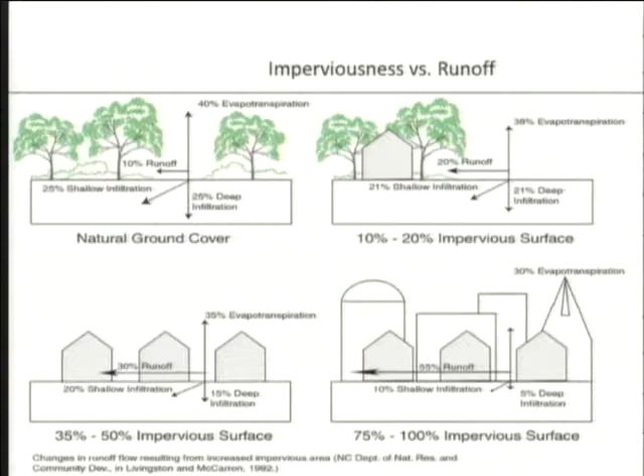At Villanova, we have a lot of projects we've developed. Some were paid by grants, some by the university, some done to meet township and state requirements. This is a little green roof we have on our CEER building, done by the university without any grant money, just to look at that technology and see how well it worked. A green roof is going to be entirely the plants and the evaporation and transpiration of the plants as they use up water.

We have about 15 rain gardens now, might be 16. They're redoing some of the center parts of campus, and we have a couple of rain gardens that keep popping up. One here with all those grasses is now, I think, 12 years old, and for monitoring has no degradation of performance. It's still working as good as the first year it was built. So it really shows how these things can be long-lasting and very friendly when they take a look at maintenance.

This is a little bioswale, one in front of one of our Fedigan buildings. And by the way, we give tours all the time of our sites, and we're glad to do it anytime anybody's interested. Just give us a holler and we'll work something up.

We even got a few rain barrels, but our results are a little mixed on an institutional basis. I think it's easier on a homeowner basis than an institutional basis.

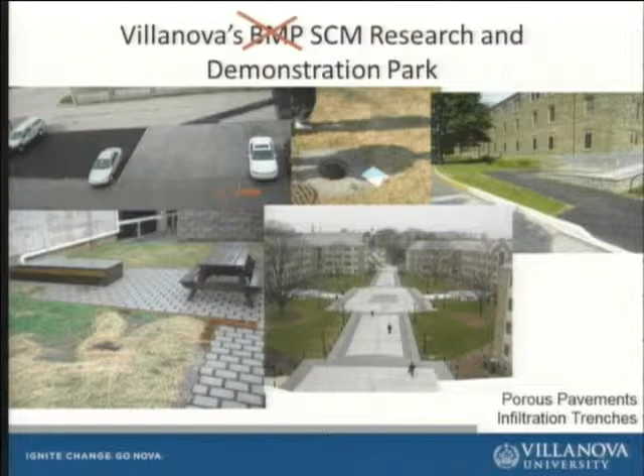But anyway, we also have a stormwater wetland that we just built this last year. This is before it filled in. This is around County Line Road, behind our law school, and it used to be a detention basin. So that's quite a retrofit, but a warning, we had water going through underdrains all the time. You just can't make any detention basin into a stormwater wetland. But any of that, my favorite projects are the rain gardens because they are simple.

They can be a very engineered structure to meet a requirement based upon a certain volume, or they can be in our backyards. One of my fellow professors has 3 of them in her backyard, that lives around this area.

They started in 1983, and since then we've been trying to figure out how they work. For example, there are very specific numbers here, like 6 inches of ponded water above the surface. That was a good idea at the time. Now we have one in Villanova that's 3 feet deep, and the one I just showed you that's worked for a long time is 18 inches deep. So a lot of these numbers, don't treat them as carved in stone, all puns intended.

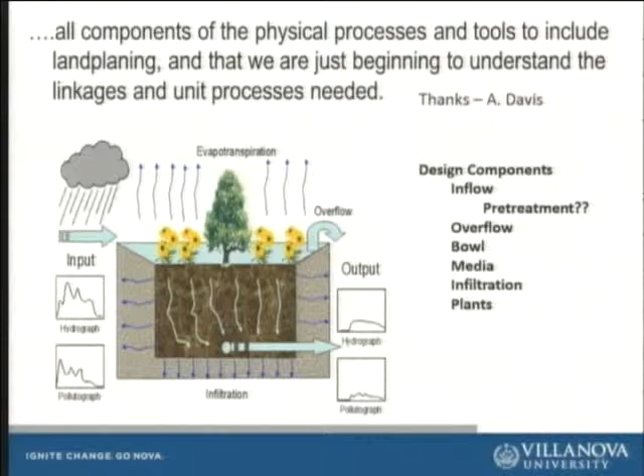We're still learning how these things work. What we do know is they seem to work very well, and they're also very robust, so you don't have to worry about redoing it every couple years. It's a very complicated thing from an engineering standpoint - we get evapotranspiration, inflow and outflow, and chemical processes - but you don't have to worry about that on a retrofit project. We can simplify this and make it so we can have something that's going to give us some good benefit without getting into all these details.

So for an example, if I'm going to build a rain garden, let's go back a little bit and look at this rain garden here. There are some components to it that are pretty obvious. One of it is you have to get water to it. Does that seem kind of simple? I can give you an example right down the road, not in this township, luckily, at a shopping center where they built some very beautiful rain gardens recently, except I don't know how any water gets to them. So one of the very simple things is the water has to get into the rain garden.

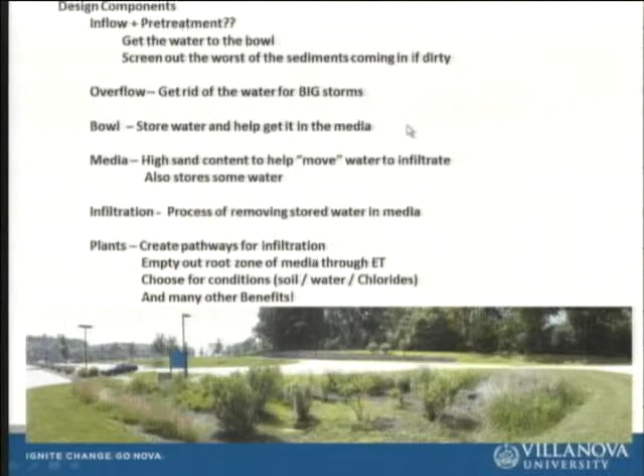So you have to - here's a test for the 3 up here - water flows downhill, right? Okay, you passed. The water has to flow into the site. I got some pictures of some in a few minutes. You can see where that does not happen.

In looking at it, the bowl part of it has a couple purposes. It holds the water temporarily to help it soak into the ground, and it basically gets rid of a lot of the sediments and trash in that bowl. So you have to think a little bit about how dirty your site is and how much grit and stuff is coming in. If it's not that dirty, the plants and the soil will take care of it, you won't have to worry about it. In our site, we haven't touched the soil surface for 12 years, but it's pretty clean coming in - it's mostly student parking in the summer, they're not there, so no big trucks, so it's pretty clean coming in.

Some places will actually have the water go through a grass strip before it gets into the rain garden, and that'll get rid of a lot of the grit and things like that. You have to worry about what happens if you have a real big storm - Hurricane Isaac or any of these things. These are designed for, as we just talked about, a half inch of runoff or 1 inch of runoff. Well, what happens when you get 2 inches, 3 inches, 4 inches? You have to figure that out - it could be as simple as just making sure you have a nice grass edge that's flat so the water can overflow and make sure it's not going into your house. Make sure you take a look at where that water is going.

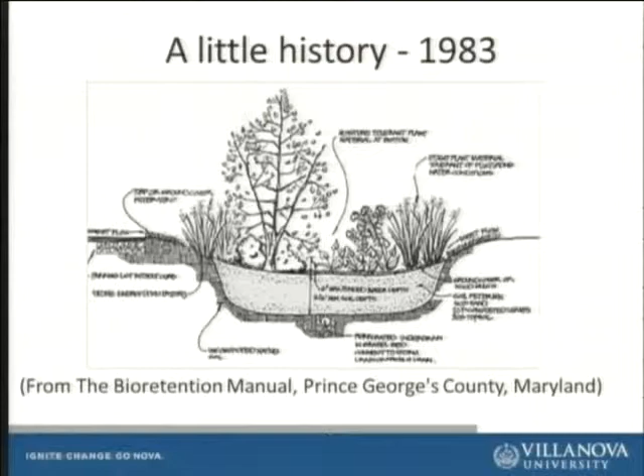There's a lot of rules of thumb. Some people use so much sand that the plants will barely grow, and that might be good in Philadelphia - I don't know if it's good in Radnor. I would use much less sandy soil here, maybe 65%, 70% - there's a lot of different mixtures. There's a firm, we bought some from Mayfield Construction, Mayfield Gardens, they have a bioinfiltration soil. It all depends, because the plants have got to grow in this stuff, right? So you want those plants to be robust, because that's what helps empty the soil of the water and also helps keep the pores so the water can go through that surface.

Keeping through infiltration is the process of removing stored water in the media. We'll talk about that a little bit later. The plants, as I said, are critical. You want a good plant mass in there.

We have a lot of different types. We have some with bushes. Our oldest one has grasses, and what we do every year is cut down the grasses in February and compost it, like we do every other place at the university where we have grasses. So that's our entire program, plus we remove soda cans and other cans, frisbees, footballs, and a few other things along the way.

So if you want a good frisbee or football, come over and visit our sites. There's probably one in there.

The temperature effects should be cleared up going through. Oils and greases are broken up at the surface. I used to think I'd never build these next to a gas station. Now I'd want to build this next to a gas station. Metals get removed in the soil. A lot of chemistry, a lot of different stuff like that we can deal with.

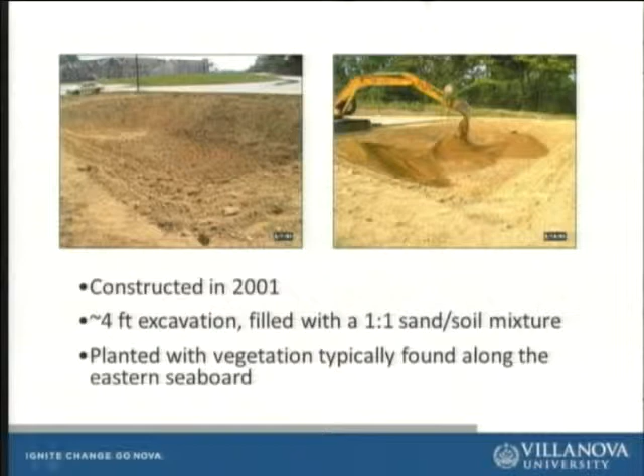There's also some ways of looking at this. Original ones always had an underdrain. We have 14 at Villanova without underdrains, and we have no problems at all. The failure mechanism of a rain garden is the surface, it's not the bottom, okay? So unless it's built in a very bad spot.

So basically, if it survives construction, in some ways you might think that if it fails we want to rebuild it, right? We just don't want to let it sit there. So an underdrain system's main purpose is in case you're really unsure of what's happening underground, and you haven't had a chance to do a lot of soil tests and things like that.

The only problem with underdrains is they release the water a little faster than I would like. So at Villanova, when we built ours, we have no underdrain. There you go, shows it coming in. A new way of looking at it is building what they call an upturn elbow. What that does is makes it a little harder for the water to leave, keeps water in there to push it and give it more time to infiltrate into the ground, and also helps with water quality.

Without oxygen, it helps to break down nitrogen, so that's a very handy way of doing it. I really should have that exit down a little bit—it can't be above, because that would not work that way.

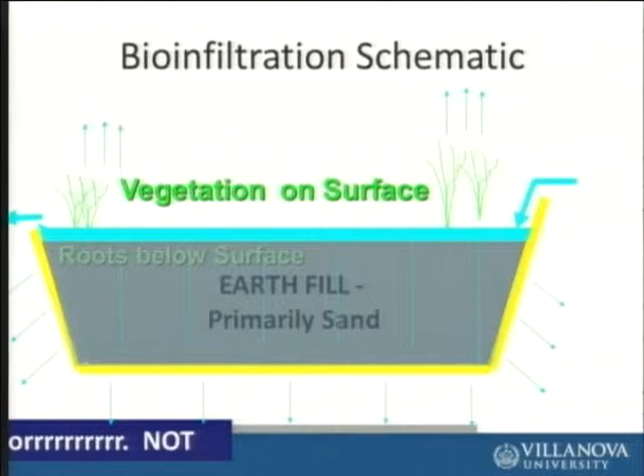At Villanova, we didn't do any of that, but when we did our soil testing, we could tell from the soil it would infiltrate, even though it does so fairly slowly. So how does it work?

The benefit of these is only about 6 or 7 times do we have any runoff leaving across the surface—everything else soaks into the ground. It's great for inspection too. If you drive by during the storm event or right afterwards, it better be full of water, right? A day or two later, it better be empty. Got it—your inspection program is done.

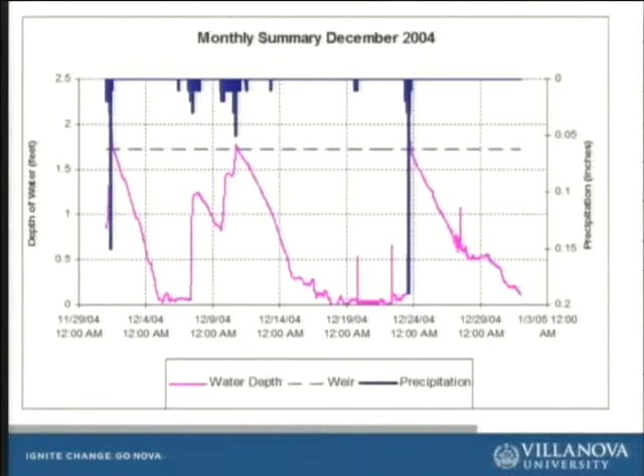All right? I try to keep things simple. Don't tell my students that—they won't believe it. We have a lot of them at Villanova.

If we have a hurricane, the water is going to go over the grass and onto the roadway. So basically, every one of my projects is a retrofit—well, I shouldn't say that. The university has built some new construction, and they had to build it to meet the stormwater requirements. I now consider it a project—I didn't have to pay for that one, which I like.

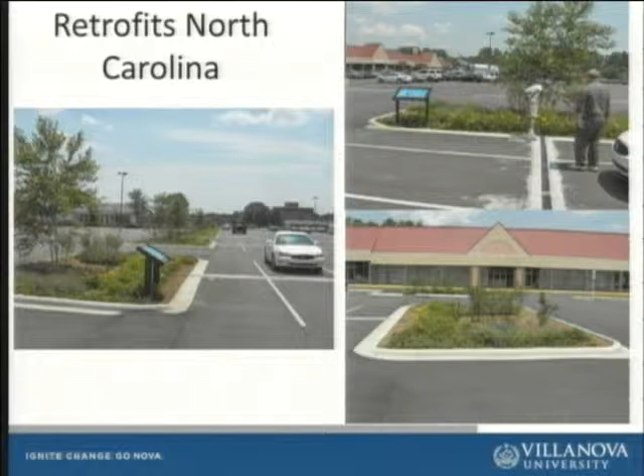They placed these over the old inlets, using the old inlet as an overflow device. Obviously this isn't your house, but you can do these almost anywhere. It just takes a little bit of imagination.

In this case, the inflow is pretty simple, right? Water just flows off the pavement and goes in. Outflow is, again, through a drainage system.

If I'm a structural engineer and I don't build the building foundations very well, they're going to fix it. A water resource engineer doesn't build it right, and we'll just let it sit there. But now I'm going to get political.

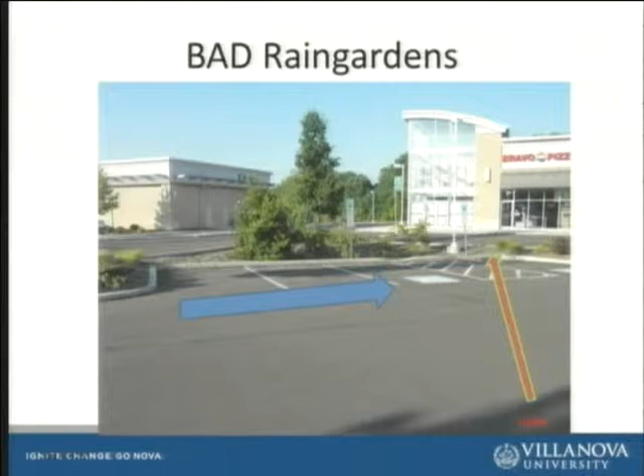Some of the rain gardens at the site are well suited. For one of them, they forgot to put the curb cut in, so there's no possibility for water to get in. But this is early - these are lessons people learn as you start a new industry.

The reason why is the law school at Villanova was built on a parking lot, so they didn't have to do much. They ended up building a little detention pond instead - I have no idea why. I would have much rather taken sites like that and made them rain gardens. I win most of my battles there, but not all of them. So that's the type of thing.

They took a street - every house in the street, they built a rain garden. It's inside the right-of-way, so the township did the construction and the dirt work. The homeowners did the planting, and the homeowners are responsible for maintenance. This was built in 2003, so it's now 9 years old.

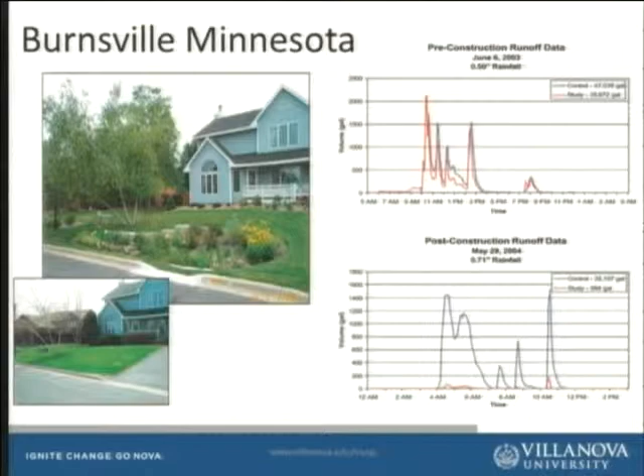All right, and I've talked on way too long. I'm going to skip this. We're building a new site at Villanova. I'll just show you a picture of it, where we're going into a swale, into a rain garden, then into an infiltration trench, trying to put some of these together. But this is too much for a homeowner. But we like the idea of sequencing things, so it's not just one device to solve all the problems. And we do this because of maintenance and longevity issues.

But anyway, I'm going to stay for the next 2 talks, but I will be leaving right at 3:30 because my mother-in-law and my nephew from the Navy in Italy are visiting, so I have to get back to that. But do you want to take a second or two for questions now, if you have any?

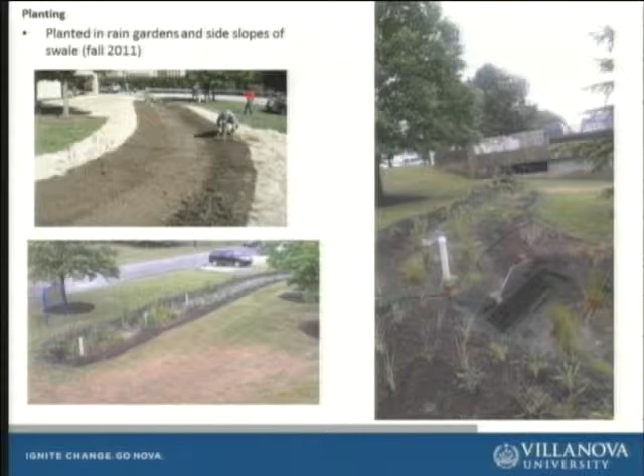Sure. I saw you changed BMP to SCM. What's an SCM? Okay. BMP came out of EPA as best management practice. And it kind of comes from the sewage treatment plants, where best available technology means we don't really understand, this is the best we can do. A lot of people in the profession, and I was part of a National Academy study a couple years back, recommended we start calling them stormwater control measures because it's a much more engineered and understood process.

This is no longer just building a pretty rain garden and not expecting results. What we found is you do expect results. These do work. They will meet the requirements. So those questions are done. We still have some more understanding to gain. But it doesn't mean pretty rain gardens isn't still a good term, especially for homeowners or projects like this.

Yes, ma'am. You were mentioning that you want the rain garden to fill up, and you also want it to empty in a certain amount of time. That's so we don't create room for mosquito breeding? Yeah, basically, water in the soil is not as much of a problem for that. There's all sorts of different studies and different thoughts on this. North Carolina basically says if it's like 2 or 3 days, you're okay. The mosquito would have to land, have it hatch, and there are different breeds. Like if you look at studies in North Carolina, they have faster breeding mosquitoes than we have.

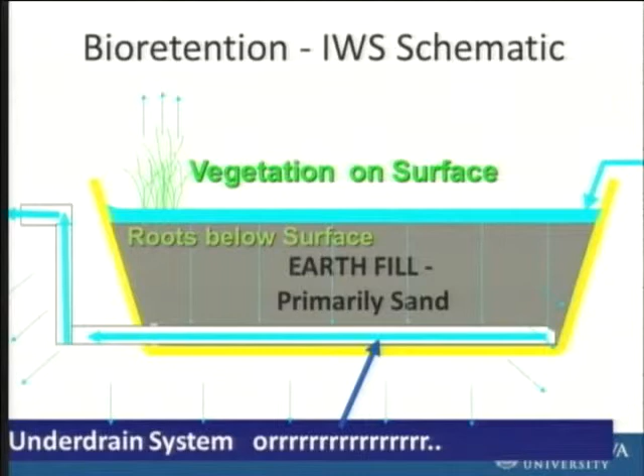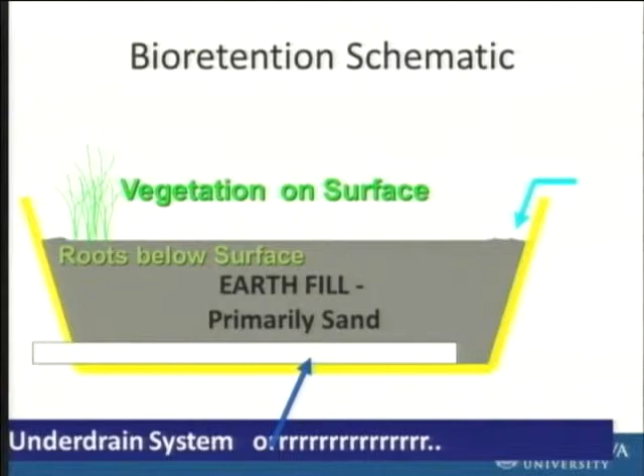This is the one that they used to do that I don't recommend anymore, the straight pipe leaving. Because this goes out too fast and doesn't infiltrate as much. And you want to get some of that water back into the ground. And lastly, what happens to all the pollution that's trapped? Okay. Well, so far, that's in the surface. As I said, the surface layer is going to take care of the metals. It's going to break down the oils, the nitrogen and phosphorus. The phosphorus binds to the soil.

And we've done a little study, and we figured out that the first two inches of soil is probably going to take about 30 years to be completely filled up. And then it's going to move into the next couple inches. Used to think, well, every 10 years, maybe we're going to have to take off the first couple inches of soils and get rid of it. And it's not going to be hazardous unless you have a smelting plant right above you or something. You can just throw it on the ground, put grass seed on it. Now I'm thinking it might be more like 50 years before you have to worry about that.

First of all, runoff is dirty when you look at the whole watershed. If you look at a little site, it's really not that dirty. In fact, to get the measurements for our studies, we have to work much harder than any sewage treatment plant operator because the percentages are very, very low. So the good news is, every 30 or 40 years, maybe you want to take a little bit off that top because of the salt buildup, because the plants aren't going to grow as well, maybe get a few extra sediments. It's basically also going to rejuvenate some of the infiltration capacity too.

So far, I keep on looking at my sites and saying, well, if I wait, I'm going to see if I can take off an inch and see how well it does. But I haven't seen any change in performance, so I haven't done that yet. So I'm hoping it happens before I retire. The only site where we've seen problems is on an infiltration trench, the rock beds, where we had a very large, very dirty area going into a very small spot. The normal ratios go about 10 to 1. We went 300 to 1. So every rain, we're getting a lot, and the bottom of that sealed very quickly, so all the infiltration is out of the sides.

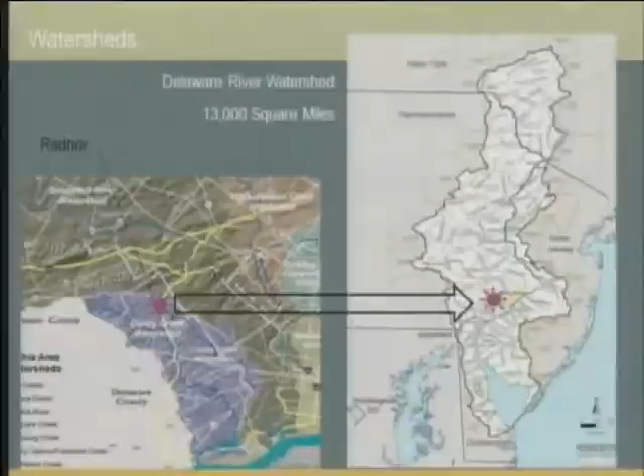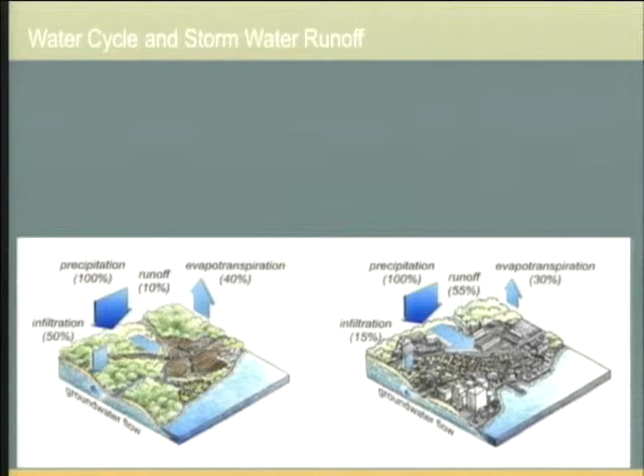I work for the Delaware Riverkeeper Network, and we do work throughout the Delaware River watershed, which is about 13,000 square miles. And right where we are now, we're in the Darby Creek and Cobbs Creek watershed. Traditionally, there has been reasonable infiltration and evapotranspiration, and because of a lot of the urban and housing development, there's a lot more runoff, so that's what we're trying to deal with.

And just as an impact explanation, when you get too much runoff flashing into streams, it just digs them right down. You get to see a lot of down-cutting streams. Sometimes those will go 15 feet down. A lot of impacts happen. You get a lot of silt pumped into the ponds, and they start to fill up. Everybody starts to have to worry about dredging. It also sucks groundwater right out of the ground, so it's bad for the woodlands it happens to be going through.

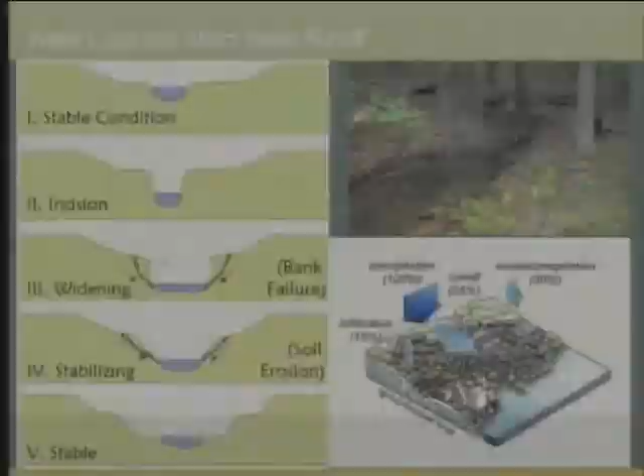So I'll just touch quickly on the different stormwater best management practices, and I'm glad there's a new term for it now rather than BMPs. Examples are rain gardens, bioswales and infiltration basins. They reduce runoff, improve infiltration and clean the pollutants. So I'll just skip right by there. These are the two basic types of rain gardens. One is with the underdrain and one's without.

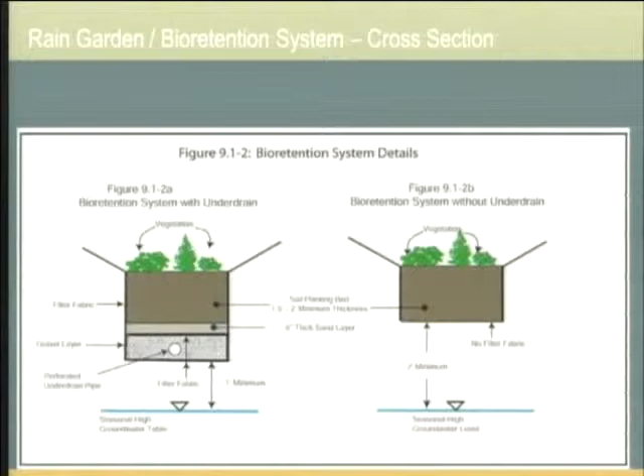So basically, the issue is, at your own property, do you have infiltration allowable? Is it clay soil where the water will not go through, or is it more sandy? If it's a clay soil and needs some help, there are different ways to deal with it. Just pond less. In other words, if the infiltration is going through slowly, just put in maybe 3 inches of water for a rain garden. If it's a sandy soil, then it could handle more, maybe a foot of water held in there.

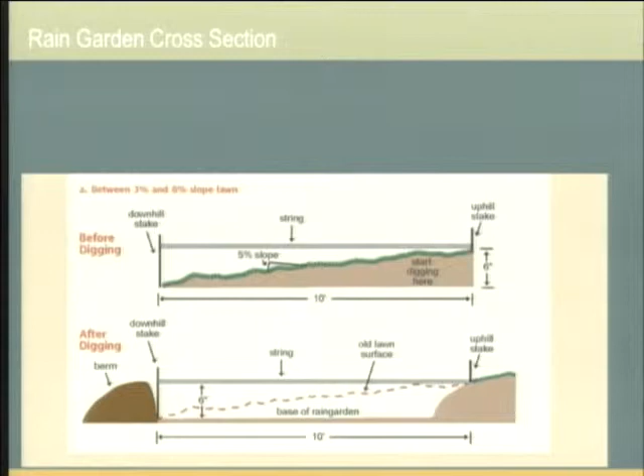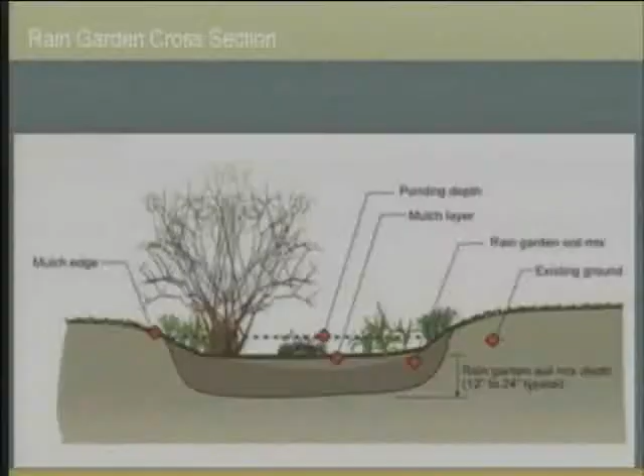And so I'll just get into some basic design considerations. Do you have a green area that's lower in elevation than your house and the pavement? If there is, or if you can dig it out a little bit, then you can put in a rain garden. Are the existing soils sandy and well drained, or clay and poorly drained? It's good to test the infiltration. The best way is to dig down where you're thinking of having a rain garden, say about a foot, and then start to test it.

There's a couple ways to test it, and I have some links for a good way to do it at home. For the larger facilities, we hire engineers to do double ring infiltration testing. What I also like to do is send out the soil for a sand, silt, clay content test, so that would go to Penn State. Most people just think of a soil test, a horticultural analysis, which is nitrogen, phosphorus, potassium, and pH. But make sure to ask for the soil texture so you can get sand, silt, clay.

I'm just going to run through the steps on a larger rain garden we just put in at Haddon Township, New Jersey, at a Van Sciver school. So I'm just going to go through the steps here.

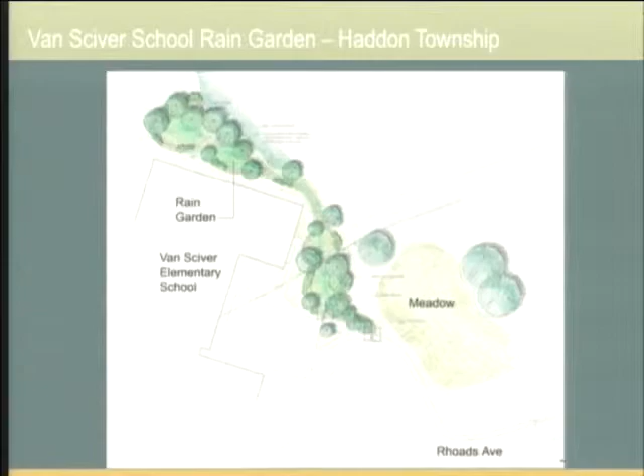We actually did some soil swapping just so that we could get good infiltration, because you also want to watch budgets, bringing in all the extra soil from off-site. Lots of times, a standard set of engineering drawings will say, put in rain garden soil, remove 3 feet of soil and put in 3 feet of soil. I'm like, that's crazy, that costs too much money. I like to work with what's there. So that's what we did at this project.

Meliora Design and Jonathan Alderson, landscape architects, did the project with my help. It's a little hard to read the engineering plans, and I don't have a pointer, but I'm going to run up here.

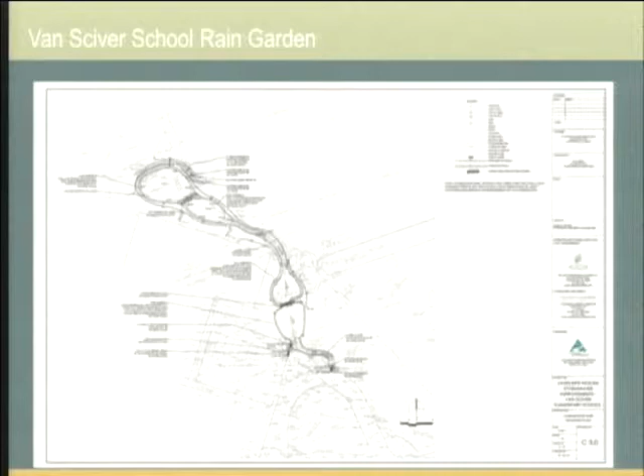So it was roughly 3 acres total, not impervious. I'd say about an acre of impervious, considering the pavements and the roofs and things like that, and there were actually some tennis courts coming in.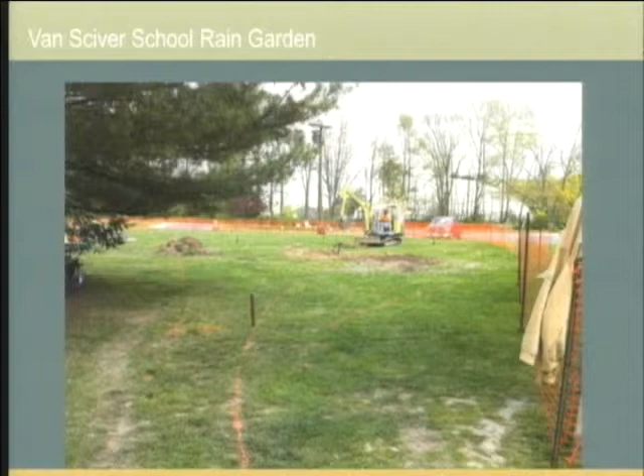So this is the area, this is half the rain garden that we're going to put in, and this shows some of the construction. We made sure to use small vehicles so we wouldn't over-compact the soil. Now, in your backyard you're just digging, but this is just an example for those interested in larger projects. So this is where we had the water come in off two areas of pavement.

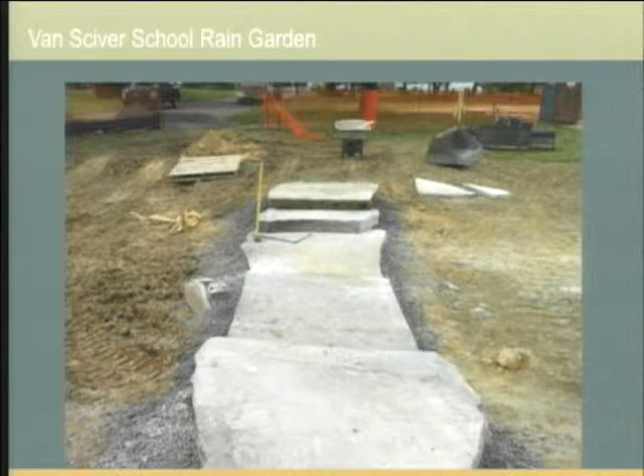And as it's downhill, what we did is we put in some mini berms, which is quite common. Here, we used this stone, which was also used for walkways, so they help pond the water just a little bit. Going downhill, we pond it, pond it, pond it.

This is during construction on half of the rain garden, the upper end, and there are some of those walkway berms, which we call weirs.

What we did was turn subsoil into good planting soil just by adding compost. The basic difference with topsoil is that it has about 5% organic matter on a dry weight basis, which is about 15% on a volume basis. So about a 5-to-1 ratio of subsoil to compost usually makes it into topsoil. Of course it matters what the soil is, whether it's heavy clay. So we just used the existing soils and added compost, which also helps with initial infiltration and water holding capacity, and as it breaks down it's very good for the soil.

This is where the township or school district paid for this, and they were told they had to do something. It was NJDEP funding, a 319H grant, federal funds out of the DEP.

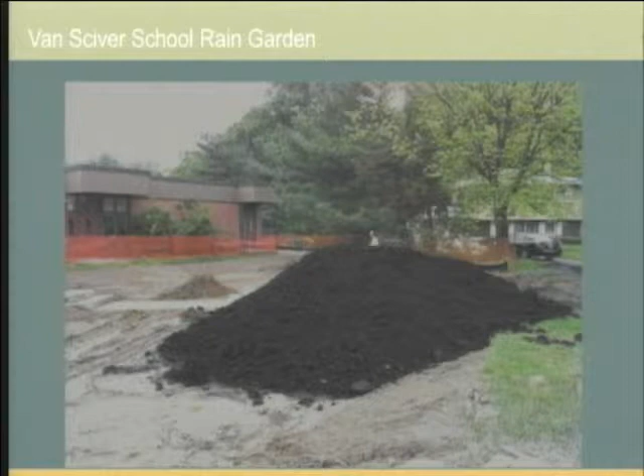But I still want to understand the mechanics of how this came to be and how somebody allocated money to do it. Sure.

Going back, Sadler's Run, we care about rivers and water quality. Sadler's Run goes into the Delaware River as it goes through Newton Creek. We care about the whole watershed, not just the river itself. So Sadler's Run runs into Newton Creek, which runs into the Delaware River.

So as we're working on Sadler's Run, we study it, and NJDEP says, before you fix Sadler's Run with all this erosion, let's work on the stormwater and all the inputs that go into it. So we came up with this project to help reduce the gush of water into Sadler's Run, which erodes it.

That's how this came about, and then we look around town for opportunities to put in rain gardens. They're all over the place. Basically, you're riding along and you go, you could put a rain garden there, you could put one there. You just need funding, so we were fortunate.

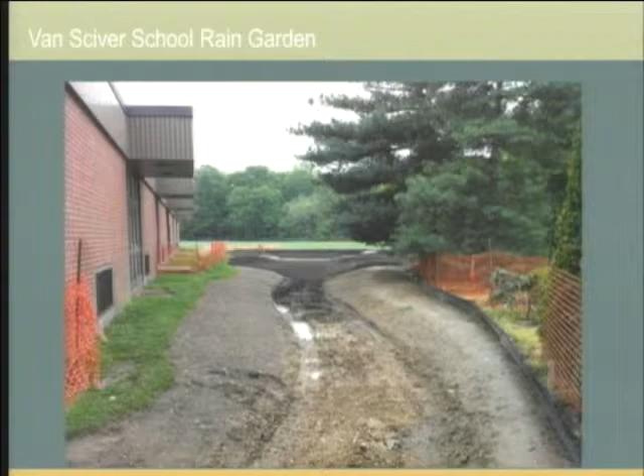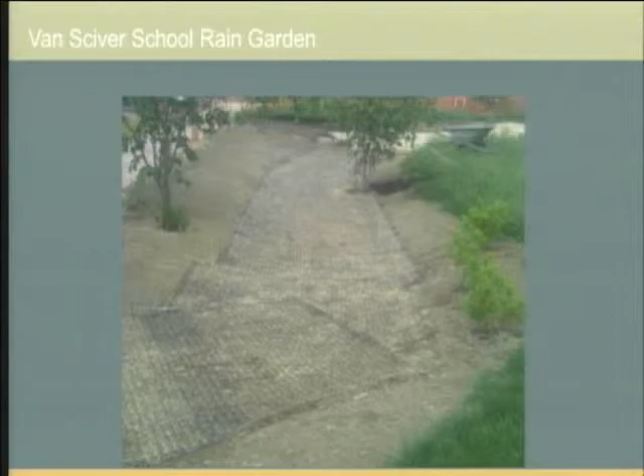So this is an example of some fabrics - if there's flow in your rain garden, you want to put down fabric to help manage the flow. This is right after we constructed it, halfway through planting, and we had a very large rainstorm. It always happens.

I wish storms would at least have the courtesy to wait for the plants to grow better. We had a huge storm. We had the inlet blocked off, but it just flooded through all this pavement - it was a fairly large watershed for a huge storm.

Do you remember what date this was? I wish I could look it up, but it was just a little flash storm, about 4 inches - it felt like 4 inches in about an hour. So it was a gusher. We haven't seen anything like it since.

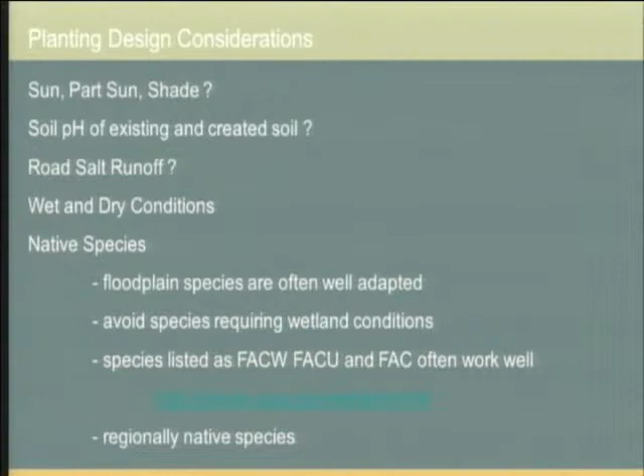Species that are listed as wetland, just don't bother with. But USDA has broken up plants into FAC wet, FAC upland, and facultative for their wetland lists. So generally, those are reasonable plants for a rain garden because they can handle wet or dry conditions. It's a very rough guideline.

Plants that grow in the region are useful because then you know they're hardy. So basically, native plants from our region are great plants. The USDA Plants Advanced Search is a good way to find plants.

So if you Google USDA plants and then find the Advanced Search button, you can pick different types of characteristics for your rain garden, including inundation period, which is generally you want about 1 to 2 days. And then whether it be sun or shade, what kind of soil, and it'll actually output a list of plants.

I did this one for the Clem McCrone rain garden, so this is the output I did. And you can search for salt tolerance, road salt tolerance. Well, I don't remember if it was road salt — it's a really good question. It was about a month since I did it, so I can't remember if it said aerial salt or soil salt.

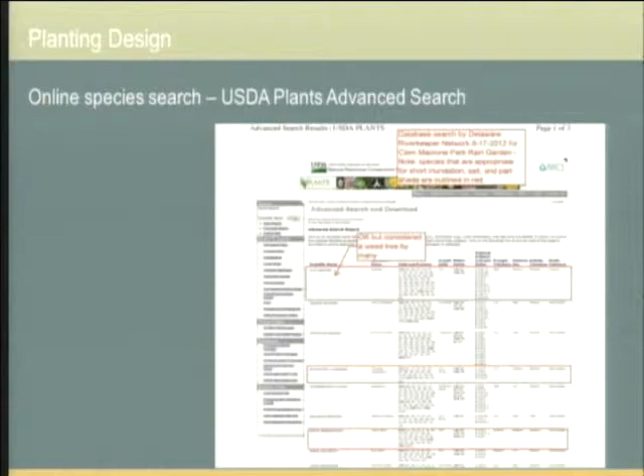So, in all of this, you'll look through this list, look through that list, and use your judgment on the plants. And then nature will take over.

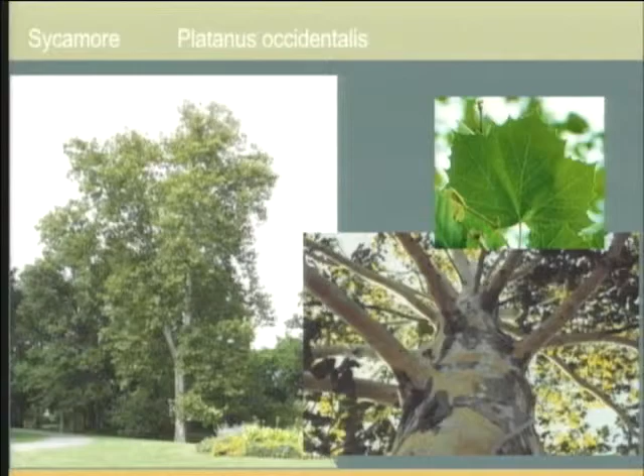Yeah, that's right. And these are just some quick examples. I'll just start with the trees. The native sycamore will do fine. The pin oak, black willow, river birch, sweet gums — you can even get these without the sticker balls.

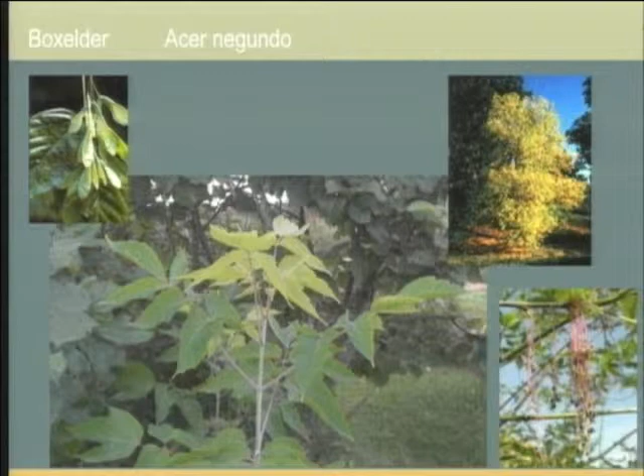Red maple doesn't like salt necessarily. Box elder — you can't buy these, but you could move them. They grow everywhere like weeds. I put one in, because they're too weedy around here, and people consider them junk trees, but they're native. Some people can't stand the box elder bugs if they infest your home. But it'll grow in a natural rain garden very quickly, and it's very fast growing — about 2-3 feet a year.

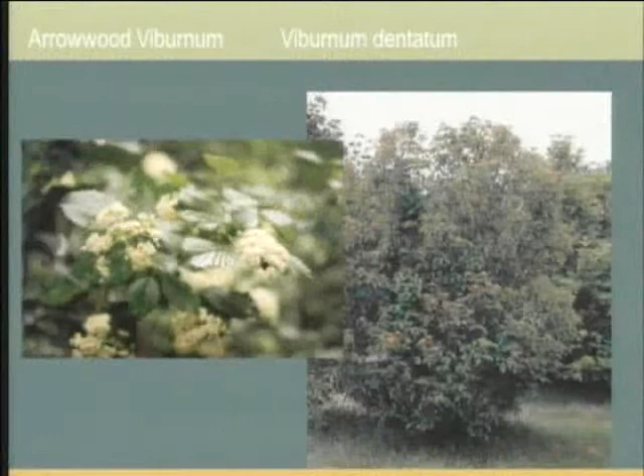Black gum is a nice plant, salt tolerant, can handle wet and dry. Winterberry — these are just some examples of shrubs. We have winterberry, yeah, that's good. Arrowwood viburnum.

Switchgrass is an amazing plant, you can't go wrong with it. I have a list of where I've borrowed so many of these photos at the end, so I put the credits right underneath.

Switchgrass likes sun, but other than that, it's very tolerant of heavy salt, no salt, inundation, no inundation. Its roots will just change up — it'll take over a rain garden. There's basically many grasses that can handle salt.

For instance, river oats is starting to be available in nurseries. Soft rush is a great plant for some of the wetter areas, swales, and foxtail sedge. There's so many different varieties of plants, and the background of what our meadows are is grasses. So if it's an open rain garden, open bioretention area, grasses are what it's going to want to be. It's nice to put in perennials and keep it pretty, but it wants to go towards the grasses and grass-like plants.

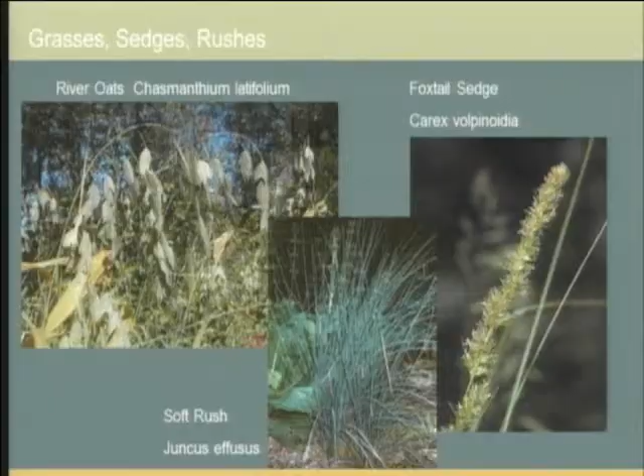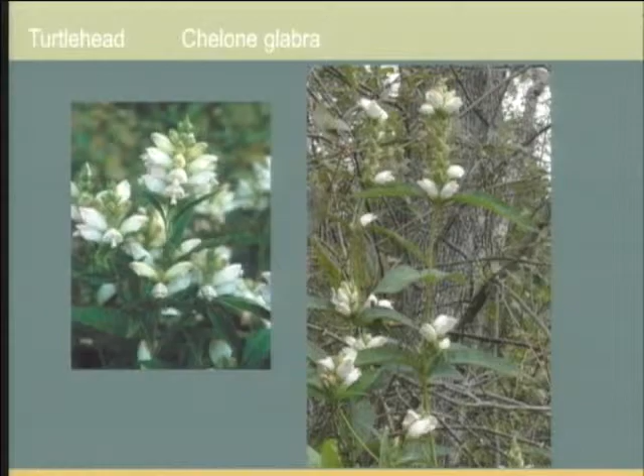Cardinal flower, in a wet spot in the rain garden, might live. Turtlehead can handle it — I put it in, but it got shaded out in my rain garden, and nothing's living anymore. But it looks great for a couple of years, and over time things change. The Joe Pye weeds, bone sets.

People would think ferns would grow well, but it really has to be a shady spot for them to grow well. On any new construction site, ferns just slowly die or barely grow while other things grow quicker. But if it's in the backyard and in the shade, it would do well. There are some that like a little more drought than the cinnamon fern.

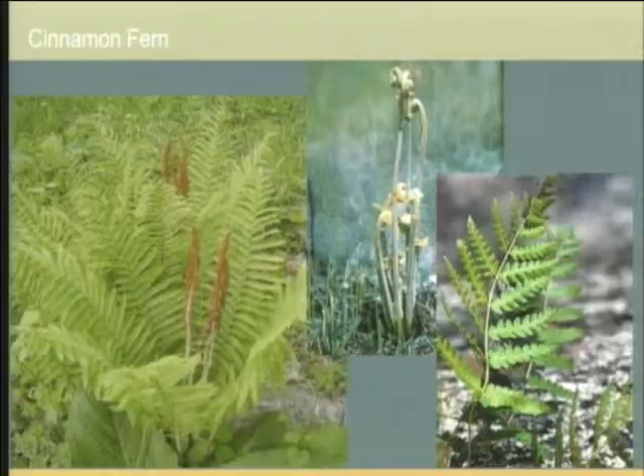Think about year-round interest when you're designing it. For instance, blue flag iris in the spring and black-eyed Susans during the summer, asters in the fall. Moss can be a component of a rain garden or your landscape.

Around the edges of a rain garden, one always has dry edges, so I'm just going to quickly flip through some of the great trees that could be used around the edges.

This just shows that I wouldn't take out non-native plants right around the rain garden unless they're invasive. Going back up to this, even a black cherry might be considered a weed tree or a junk tree, but it's got great wildlife value.

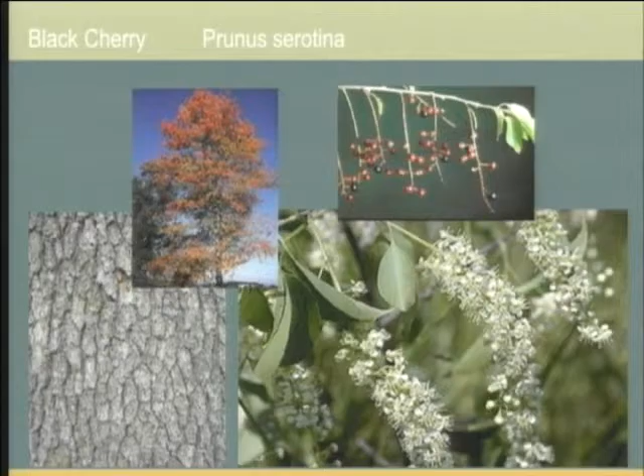Quickly, Pinxterbloom likes the sand, and maple leaf viburnum. Now you're probably wondering where to find all these things.

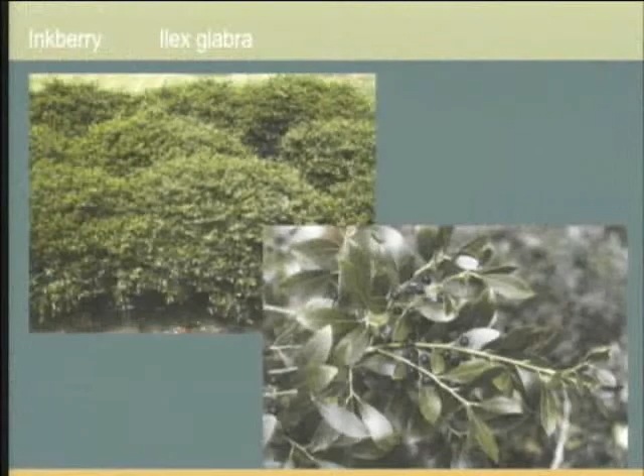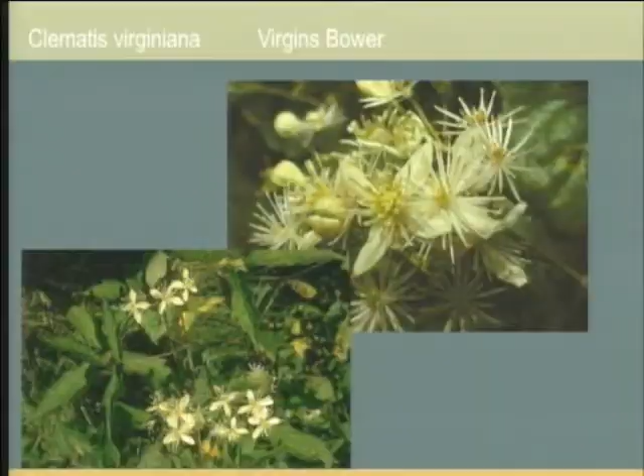The Pennsylvania Native Plant Society has a good list of nurseries. Some of these can also be found at the big box stores, but generally only about 1 out of 50 plants at, say, a Home Depot is a native. And sometimes they're mislabeled — I bought a native witch hazel at a Home Depot and it wasn't, it was non-native. So these types of plants can be put around the edges of the rain garden.

Even a plant like this little blue stem — you look it up and it likes severe drought — it'll even grow in a rain garden. And also the Andropogon virginicus. Thank you, Rob.

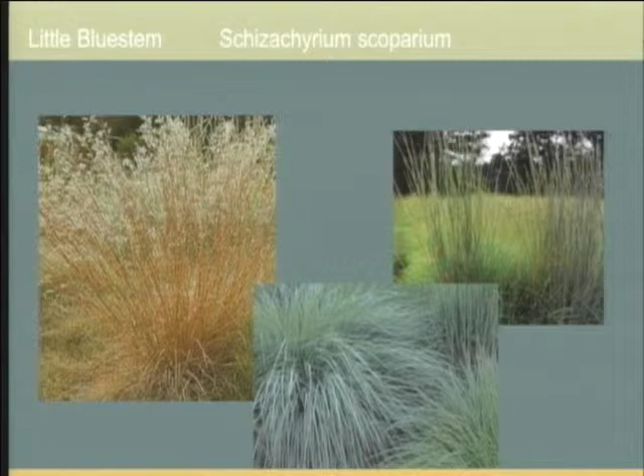Which is a blue stem also, or a beard — Andropogon virginicus, I'm sorry, I'm forgetting the common name on it. Even that plant, even though it's listed as more of an upland plant, can do just great in a rain garden.

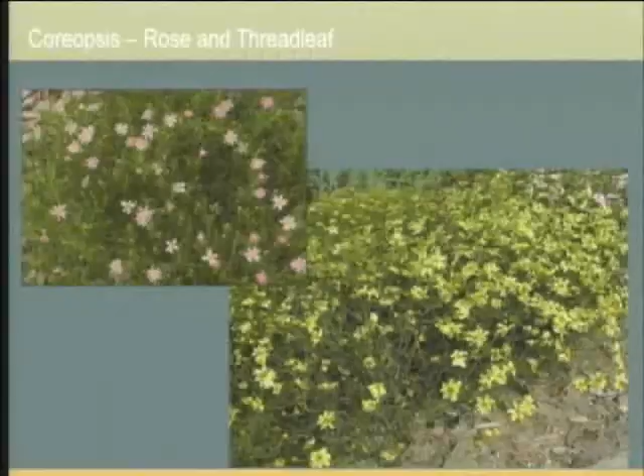Indian grass can handle a rain garden. Purple coneflower can. Coreopsis, Monarda, they can do rain gardens too. There's the asters, and this likes a little bit of moisture.

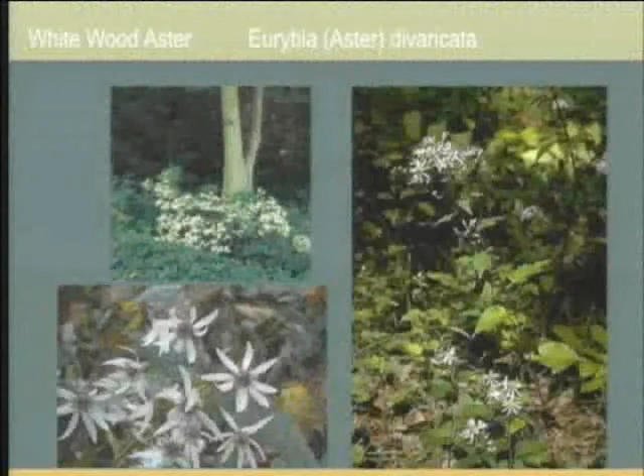White wood aster just on the drier fringes of the rain garden. New York fern would do fine down in the bottom of the rain garden too, and it can also work in uplands.

I'll flip through these quick. Very few grasses like the shade, especially native grasses. There's one or two oddballs like wood reed grass, which you could buy at a wholesale or maybe a specialty shop like Red Bud Nursery might have them.

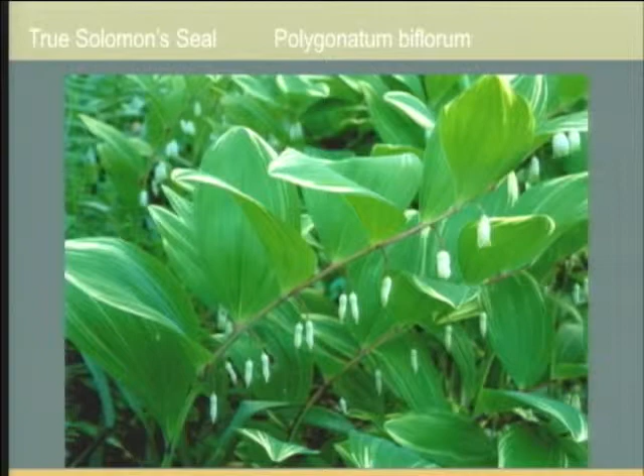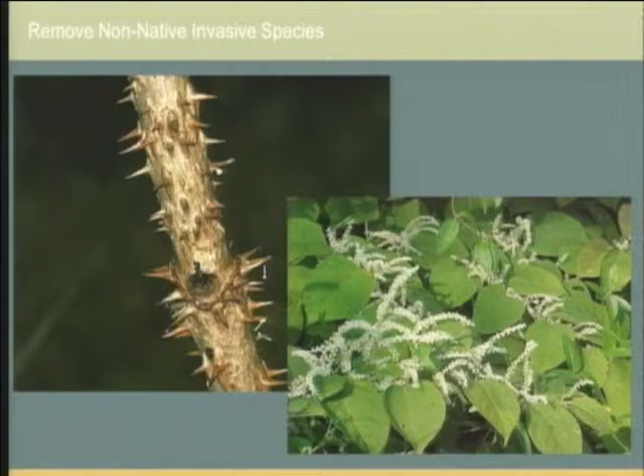Mountain laurels for the fringes, and just a note — if you have non-natives around, get them out so they don't invade the rain garden. These are just two examples: devil's walking stick and Japanese knotweed.

Any questions? We took care of plenty during the talk, so I think we're ready to go.

Be on the desktop. I don't see it. I see my presentation, I'm not sure if you put the other one on there. I didn't know about the video. Was that on this? Yeah, it was on the flash drive. It's no worries. Sure.

So I sort of have a big picture — where can we go with this? What's the benefit of these stormwater control measures? People think of them as individual, disparate pieces of infrastructure, but what's the impact they could actually have in improving a community? I'm here to present the Philadelphia perspective, where we have a program in its second year of implementation that includes more than $2 billion of the city's investment towards stormwater management infrastructure.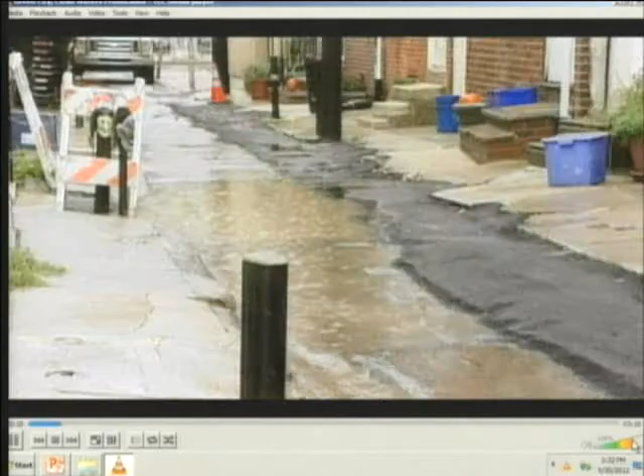You know what? It's no problem. It gives a better intro than I could, but it's no worries.

We have a few great videos. If anyone's familiar with Green Treks, the organization, they make really wonderful sort of storytelling videos. I gave a rain barrel workshop a few months ago where I used a few of them. They have produced for the water department a how to install a rain barrel workshop video. They have our Green City Clean Waters story.

They have a 3-minute sort of short summary, which I was going to show you, as well as I think a 10-minute really detailed story, but it just gives sort of the overview of who is involved from various city agencies and what the overall goals of the program are. I think you can link to them from our website directly, which is phillywatersheds.org.

What I'm here to talk about is the Green City Clean Waters program, which, as I mentioned, is the city's more than $2 billion commitment. It's a regulatory obligation for the city of Philadelphia. It's aimed at our Clean Water Act obligations, specifically our combined sewer overflow regulatory obligations.

So the city of Philadelphia is split. It's a 60-40 split. 60% of the city is managed by what's called a combined sewer system, which means that the sanitary connections from your home, as well as the stormwater inlets in the street, are actually combined into one intercepting system that's designed to go to the wastewater treatment plant. But during wet weather, that system is designed to overflow that mixture of sewage and stormwater into our rivers and streams in order to protect the wastewater treatment plants.

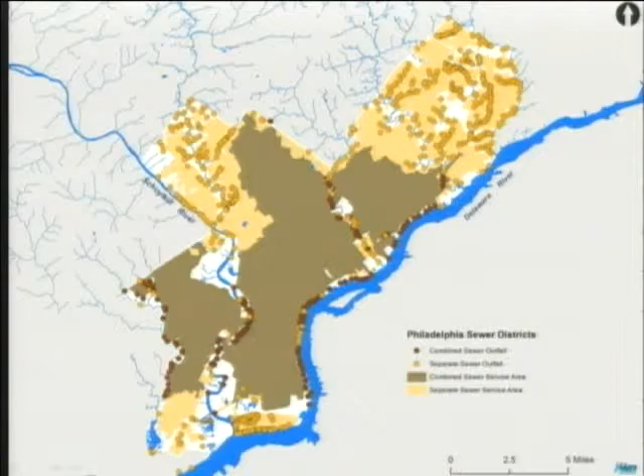One is through what we're calling privately funded green stormwater infrastructure, which is being achieved through our stormwater regulations that have been in place since 2006, and I'll talk about those in a few minutes. There's what we're calling the follow the public works method, which means that any time the water department replaces any sort of piping within the streets and right-of-ways, they should be replacing those streets with streets that incorporate stormwater management controls, and the same would go for the streets department within the city of Philadelphia.

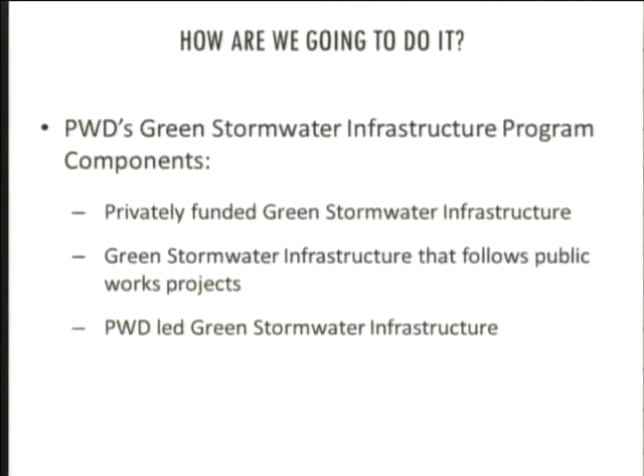And the last is what we're calling water department-led green infrastructure. That's where they're actually looking for opportunities, right now mainly on publicly owned spaces, but we're also looking at public-private partnerships, basically looking for large opportunities to implement regional control facilities and other sort of big green stormwater infrastructure.

But that established a first of its kind set of stormwater regs that actually not only worked for greenfield development, but actually redevelopment within an area, because a lot of times what you hear is pre versus post when it comes to development, and what this actually did was push people back to a higher rate of stormwater management. If you're redeveloping a parking lot, you have to do more than just replace it with the stormwater control that would have been on a parking lot.

What we like to highlight here is that throughout the city, we're going to be achieving our greened acres, which is our unit of measure for our program. And this will be coming to us right now for every development that comes into the city, disturbing an area greater than 15,000 square feet.

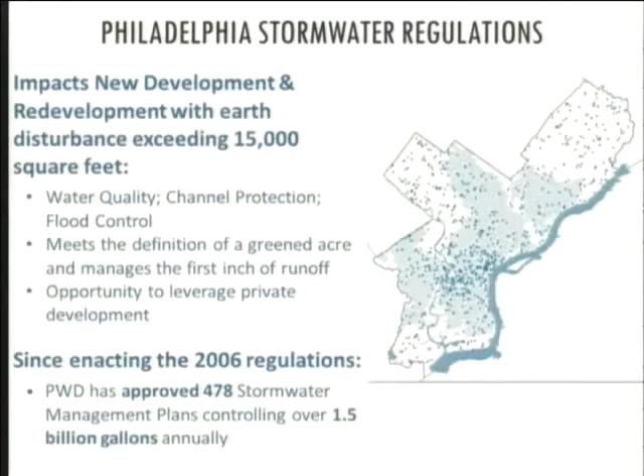I also mentioned that the Philadelphia Water Department is a stormwater utility, which means that they collect as a part of their water revenues a stormwater rate. That's been in place since the late 60s, but over the past decade, they've actually been working to update the rate structure, because originally it was in place using your water meter as a surrogate for what your stormwater rate should be, because that was the information that they had available.

But through the advances with what's called geographic information systems and data systems and better understandings of what the actual parcels are made up of on the ground, they were able to go back and reevaluate your stormwater rate based on how much stormwater the parcel is generating.

So what we have here are two sort of opposite side of the spectrum examples, where on the left you're looking at a parcel where the building occupies the entire parcel. It's going to be a multifamily residential. This is an apartment building essentially covering the entire site. Gross area is 24,000 square feet. Impervious area, 24,000 square feet. Previously, they were charged a stormwater fee of $4,700 a month because they occupied a huge meter for that many units within the structure, where this site on the right, it's 600,000 square feet, 500,000 of which were impervious.

And because it's theoretically a big box retail site, may have some sinks, a few restrooms, not a large meter, their stormwater bill was previously $400 a month because that's how the rates had been set. Now that site has been readjusted based on a gross area impervious area ratio to be a $2,500 a month stormwater cost. What we're hoping that means to our program is that a site like this with a really large parking lot is going to be interested in retrofitting and managing stormwater on site.

When I mentioned following the public works, we're actually in the process right now of establishing a tool that will be useful, I think, to a number of municipalities. We're developing a Green Streets design manual that'll have designs and specifications for putting green streets infrastructure into the ground for basically any utility that's going to open up a street, especially curb-to-curb openings, which is often what the city of Philadelphia does when doing pipe replacement for the water department.

We have a note in here about streets being resurfaced. It's not yet going to trigger this process for just a strict repaving or resurfacing of a street, but new streets going in and curb-to-curb openings ideally will be able to sync up so that every street that's replaced within the city is replaced using green stormwater infrastructure tools on top. The manual is in draft right now. We're hoping for it to be released publicly late this winter.

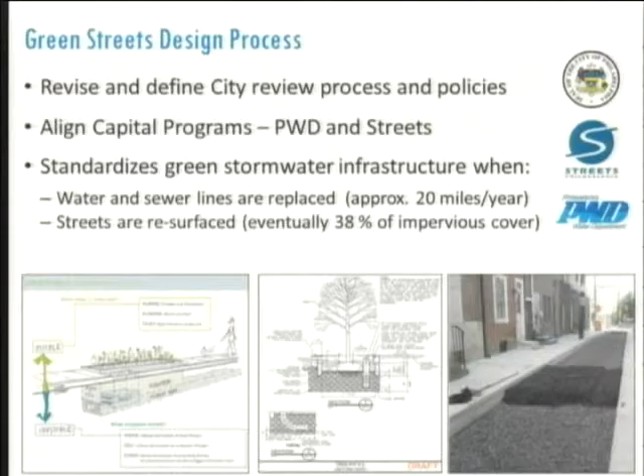Then under the umbrella of PWD-initiated projects, we're actually working right now on a number of strategic initiatives, partnering with our fellow brother and sister agencies. Green Schools is one where we're partnering with the School District of Philadelphia, the Department of Parks and Recreation, and a nonprofit by the name of the Trust for Public Land.

There's a program called Green 2015 where we're seeking to retrofit a number of city schools that are essentially big paved areas to provide outdoor learning spaces, classrooms, and green spaces within the communities. And these are some real examples that have been implemented in the past couple of years: Greenfield Elementary School in Center City and the Wissahickon Charter School in East Falls.

So will the PWD give them money from the stormwater utility? We're actually doing design, contracting, construction, the whole process. And then O&M is built in after the fact. It's funds from the water department. It all comes in as one bundle. You immediately think Philadelphia schools are in bankruptcy, so how do they... Right. And the other interesting thing is that the School District of Philadelphia is actually under a separate charter from the City of Philadelphia. They're not actually a part of the City of Philadelphia government.

As far as water department monies are concerned, it's like spending it on private property, which is how the Trust for Public Land and Parks and Recreation have been brought in as partners. It's a great program, a wonderful gateway into the community.

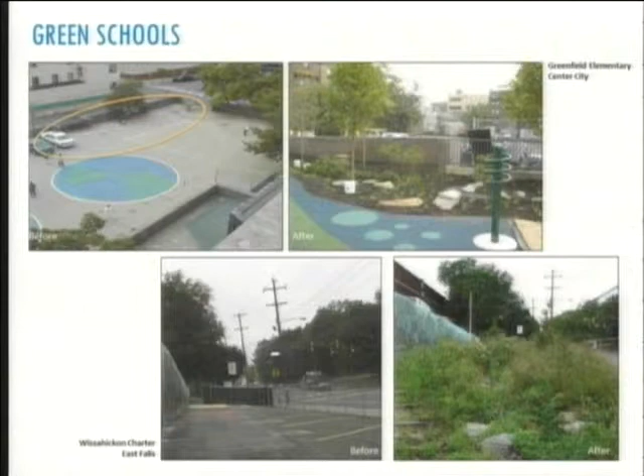It makes up about 3% of the impervious cover within the combined sewer area. So it's not our biggest target in terms of land area, but it's a huge target in terms of influencing city residents and educating them about the broader program that's going to change the face of our city over the next 25 years.

Green parks and recreation space is another big target for us. When we think about park systems, you heard a lot in the previous two speakers' presentations about managing impervious cover, and park spaces are typically green.

What we like to think of these as are the bowls. If you can find the park at the center of a bowl, where you can disconnect the surrounding streets and impervious area to them without compromising the function of the park as it is currently, you've created an opportunity for essentially a low-cost or lower-cost retrofit of that space.

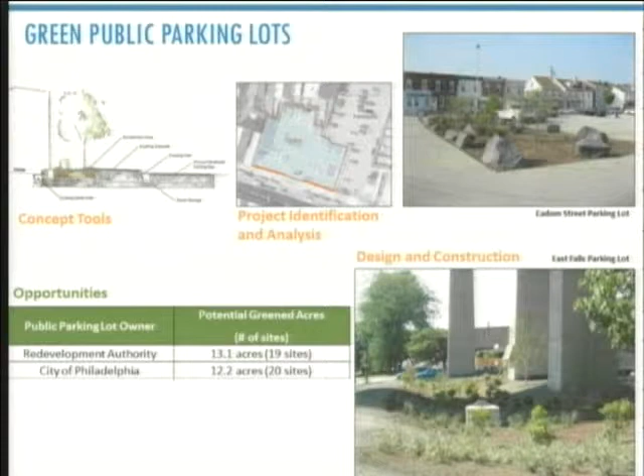What we're now looking into is opportunities for depaving formerly used parking sites or retrofitting them with stormwater management capacity, so that we help lower the bills for their new stormwater rates and create stormwater management opportunities. Right now, we're targeting publicly owned redevelopment authority and City of Philadelphia parking lots, but public-private cost sharing is something we're looking into as we move forward.

Green Homes is a part of our program that hasn't been formally enveloped into our regulatory obligations as of yet, because if you think about the logistics of taking credit on an annual report with your regulators for what's happening with an individual rain barrel on a person's home, it would be entirely too daunting at this phase of the game for us to undertake.

But what we have done is establish a homeowner's guide to stormwater management, which incorporates things like installation of rain gardens, rain barrels, downspout disconnects, and other tools for homeowners. This serves as an education tool, but over the coming 5 to 10 years we're going to be piloting more structured approaches with willing homeowners so we can tackle that other 20% of the impervious cover we want to manage, to see if there are low-cost opportunities. This guide is available on our website as a PDF download, and we actually gave a copy to Radnor a number of years ago to update and use on their own.

When I mentioned that we're piloting a number of things, we have a program right now called Rain Check. This is also on our phillywatersheds.org website, where you can see how we're piloting some of these practices at the individual residential level and how we're starting to track them, to take advantage of whether or not this might be a cost-beneficial approach for moving forward with our program, as well as educating and outreaching to our community and bringing additional resources to them.

Permeable pavement is another big one for areas, especially where they have small driveways within the city. It's an opportunity where you don't have to change the surface a whole lot. I know my house in Garrett Hill is 5 years old and has a paver driveway. Unfortunately, I know it's on top of clay soil, not any sort of an underbed that would have allowed for drainage. It's sort of a slightly more cost-intensive excavation and construction process, but if you're going for a stormwater utility fee at the end of the day, the credit may be worth your while.

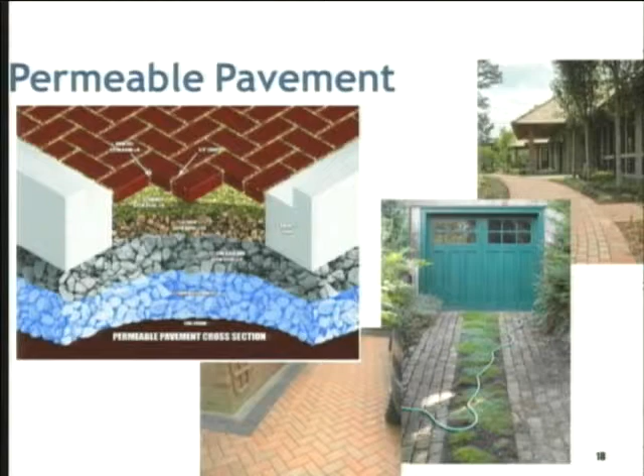But the other environmental benefit of these things is that each individual home that takes that first step, just by having a rain barrel or downspout disconnection out there, is thereby educating their community, and the more of these practices we have out there, the greater the benefit across the board.

And then, of course, there's the personal benefits. If you had a rain barrel, it could save you money in terms of washing your car, watering your plants, watering your lawn, all those other things. I don't need to go into that a whole lot for you all, but the personal benefits are there as well. I just threw in a bunch of photos that I can just talk about as we roll through.

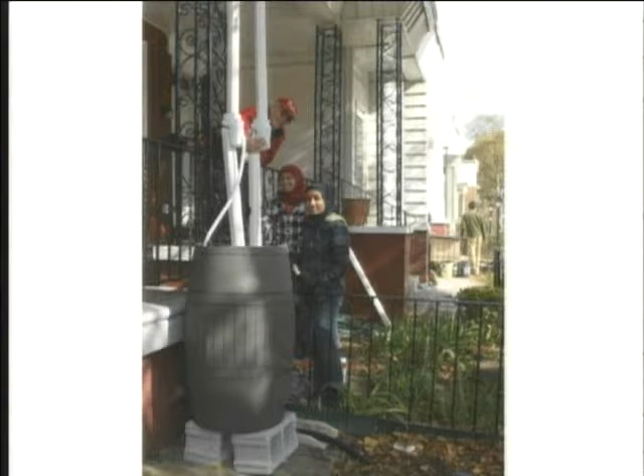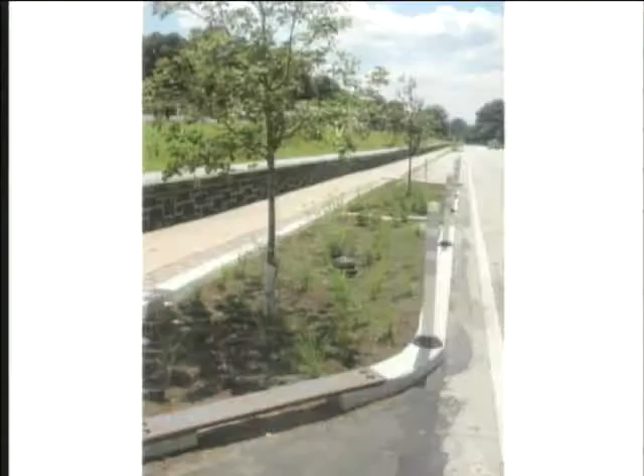I have some images here of street greening. These are our sidewalk and bump out planters.

Do you know how much pervious pavement costs versus regular asphalt? Right now it's more expensive. I can't give you a per square foot figure.